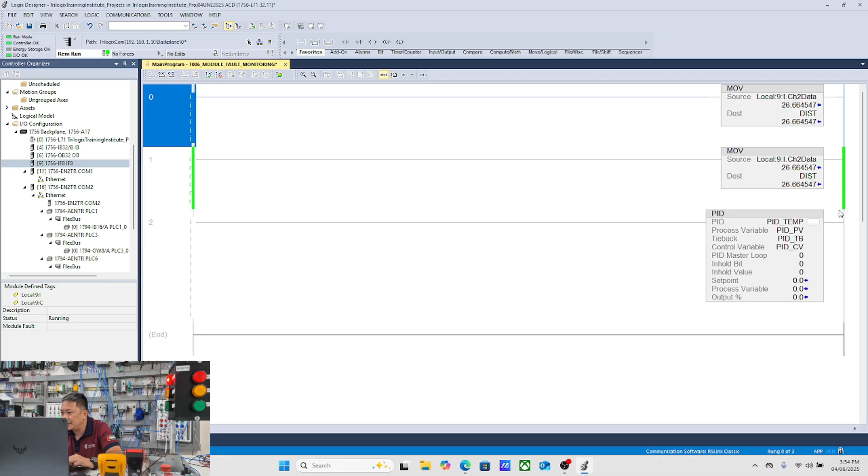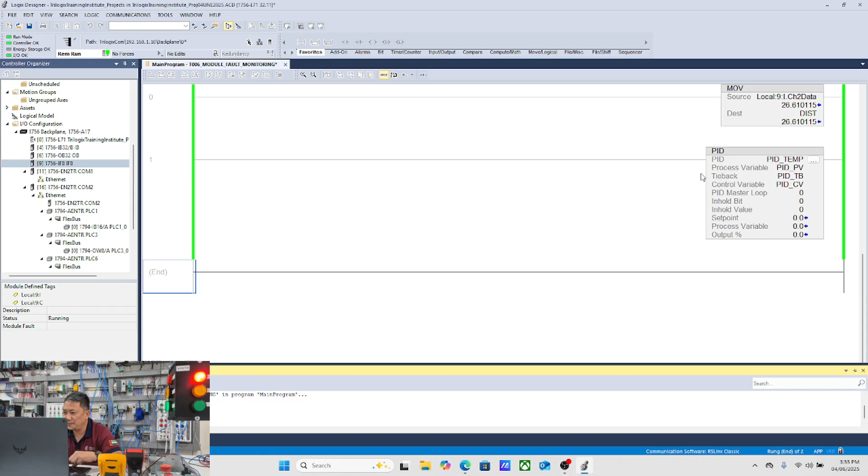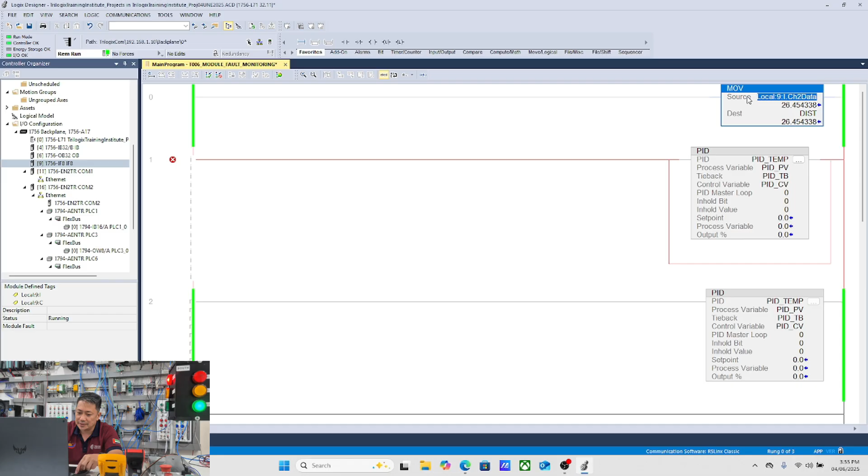So, what we're going to do is, I will put my branch. So, double click ako dito. So, online editing tayo guys ha, para mabilis tayo. Okay. Then, copy ko itong move. Control C, then Control V. Then, delete ko to. Then, I will put my PV here.

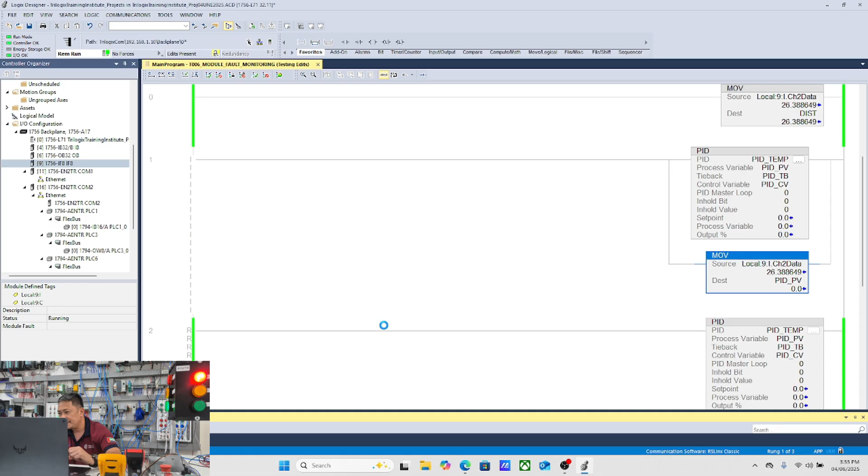Okay. So, para mag-transfer yung variable, yung real value to real value, it will transfer or it will move to PID process variable. So, yes. So, meron akong process variable. Of course, we need to go back to our PID blocks.

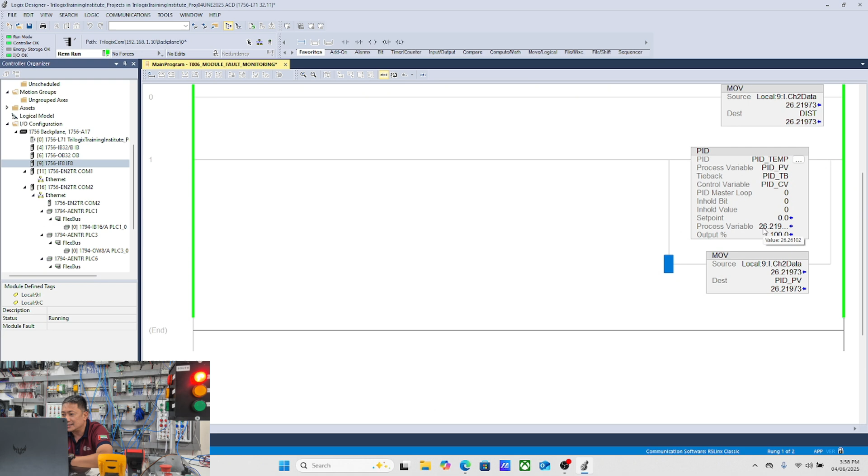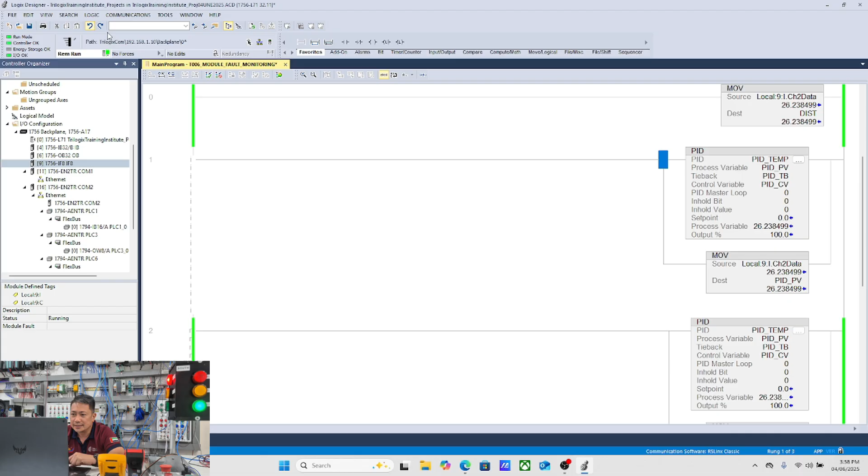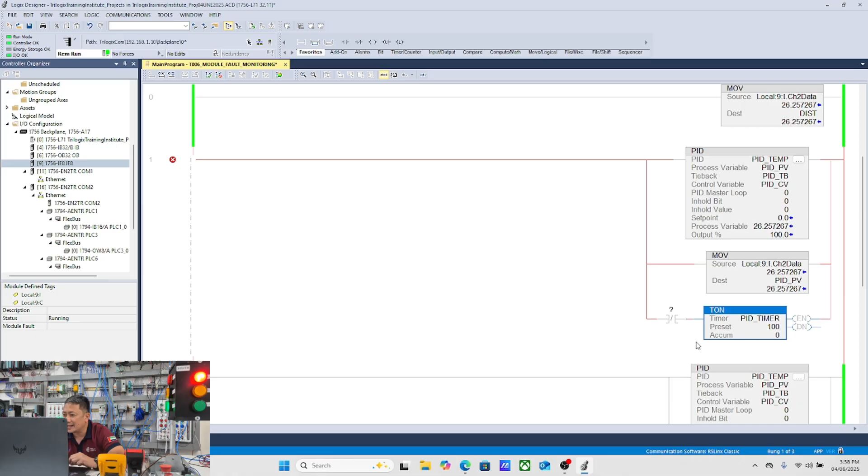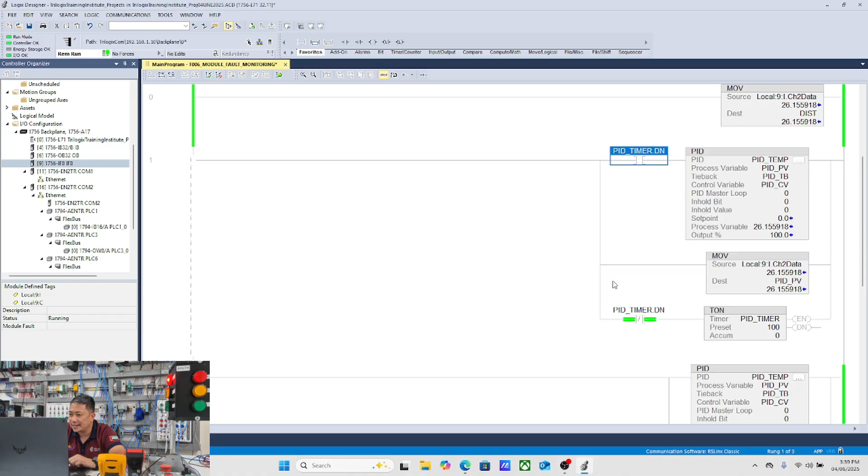So, here, branch level. Maglalagay ako ngayon ng timer ko. So, timer on. So, I have here is the normally closed. So, this will be my PID timer. Then, maglalagay lang ako ng for every 100 milliseconds, mag-update yung ating PID control. So, from here, I need a PID underscore timer done bit. Of course, I need this timer here in the upper side, Control V, but normally open. Of course, lagyan na rin natin itong ating move instruction dito, Control V. Yan. So, mag-update ito every 100 milliseconds.

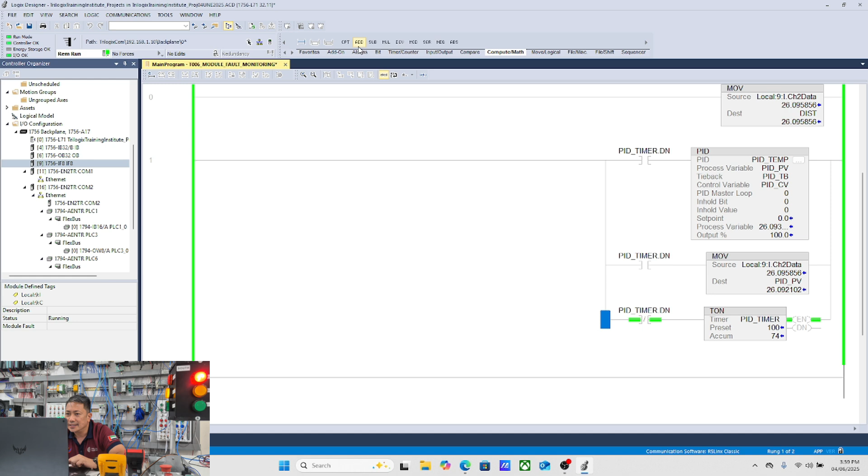So, in order to come out with my output percent, maglalagay ako ng aking compute math. So, how to put the compute math? Double click again kasi online pala ulit tayo. So, I need the branch level again. Branch level. Then I need the compute math. So the destination will be my PV, PID PV.

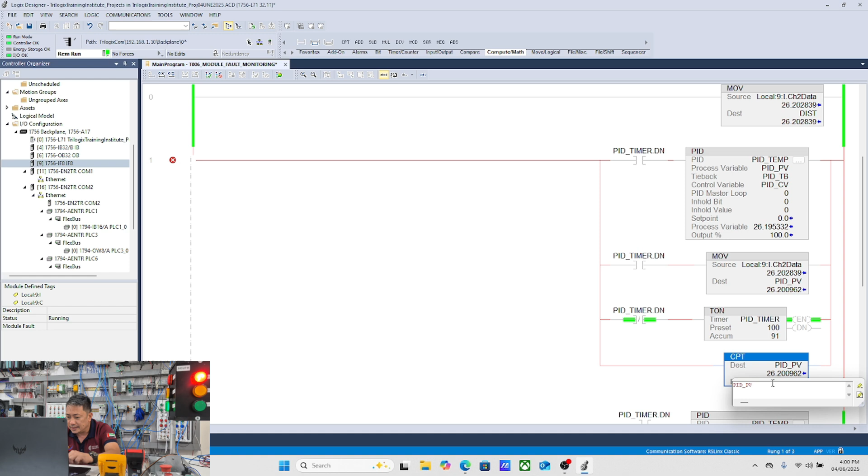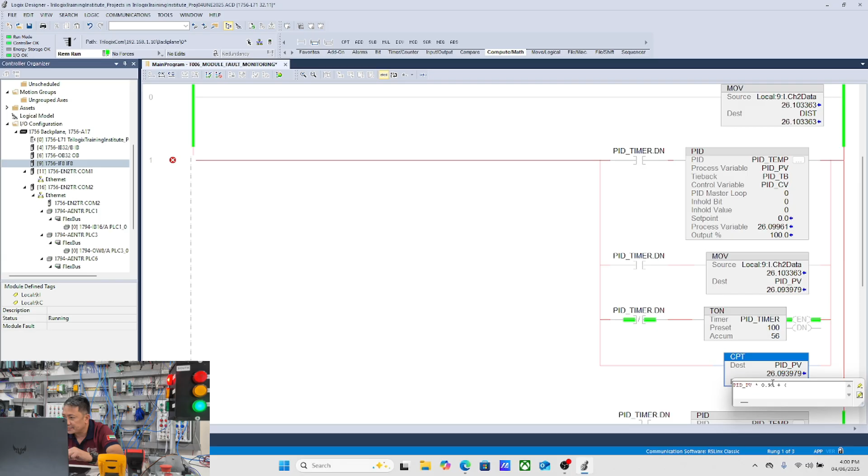Then the expression is PID underscore PV, Control V, times 0.99 plus, space, with my PID CV, Control C, Control V, space times 0.01.

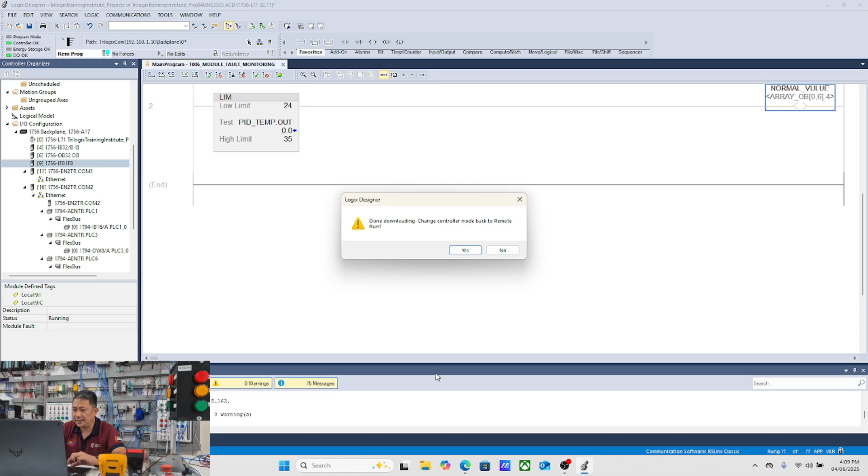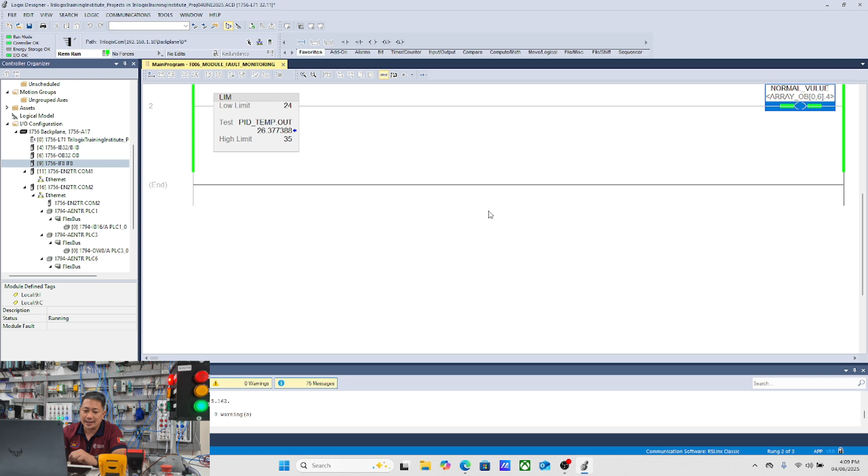Okay. So, between that range, meron tayong indication ng control. And if something is wrong, tataas siya. So, I will touch the temperature sensor. So of course, tataas yung temperatura niya. The temperature will go high into 37 something. So tingnan natin ang mangyayari.

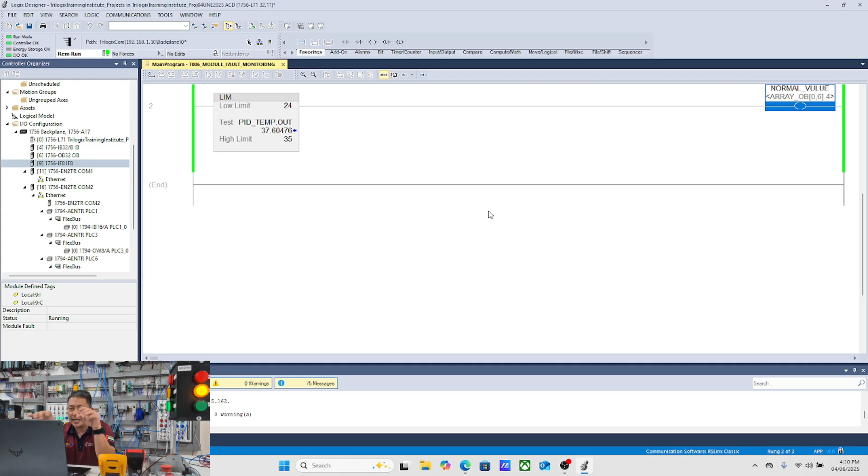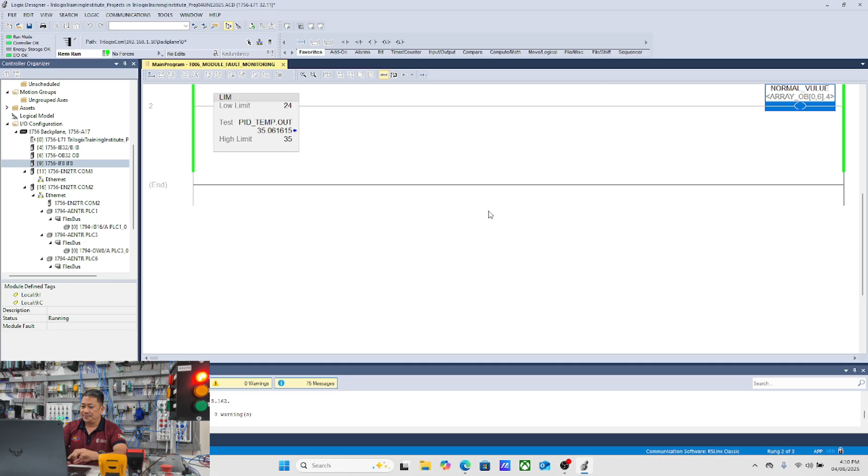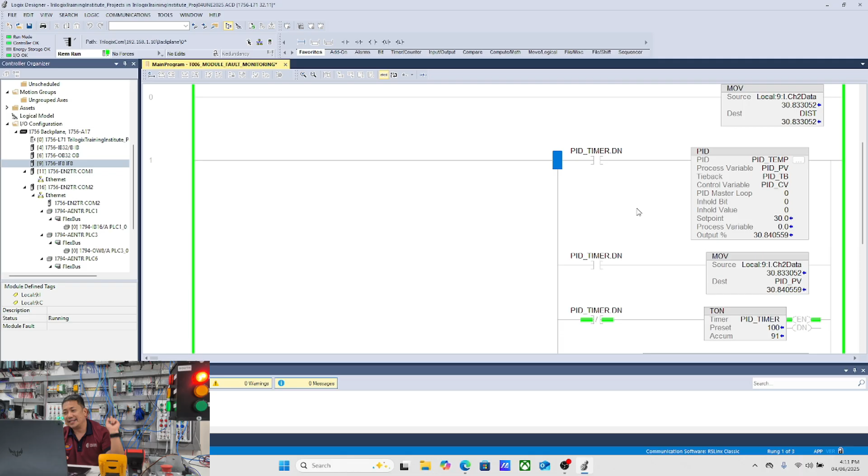So again, i-open natin ang ating proportional integral derivative. For example, meron tayong set point. Pwede tayo maglagay dito ng set point. Ang set point natin is, for example, 30 degree. Okay, yan ang set point natin. So hahabulin ng PID control yung set point na yun. So let's go to another trending. We will go to our trending. So paano ako gagawa ng trend? Okay.